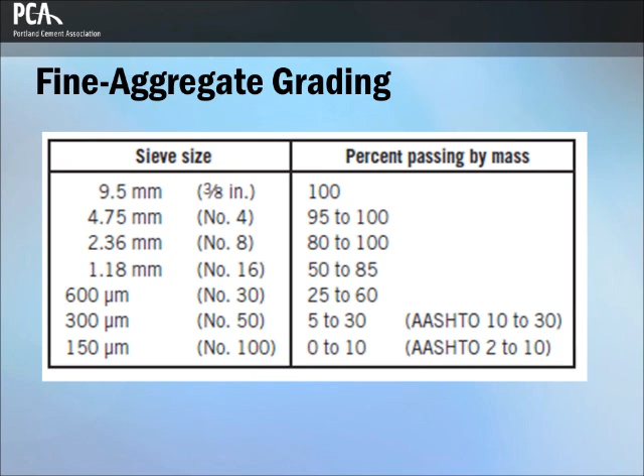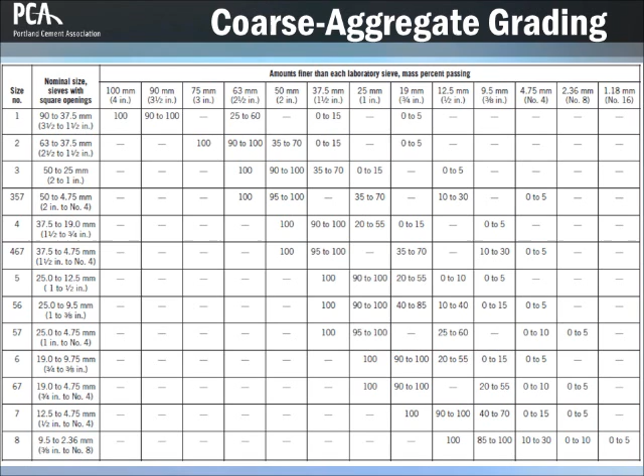The coarse aggregate grading requirements of ASTM C33 permit a wide range of grading and a variety of grading sizes, as shown in this table. The grading for a given maximum size coarse aggregate can be varied over a moderate range without appreciable effect on cement and water requirement of a mixture if the proportion of fine aggregate to total aggregate produces concrete of good workability.

The maximum size of coarse aggregate used in concrete has a direct bearing on the economy of concrete. Usually more water and cement is required for small size aggregates than for large sizes, due to an increase in total aggregate surface area. These graphs show that for a given water-cement ratio, the amount of cement or water required decreases as the maximum size of coarse aggregate increases.

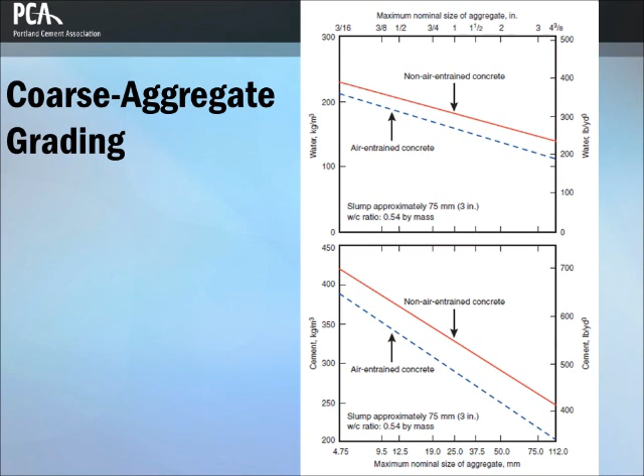Aggregates of different maximum sizes may give slightly different concrete strengths for the same water-cement ratio. Typically, concrete with a smaller maximum size aggregate will have a higher compressive strength. The terminology used to specify size of coarse aggregate must be chosen carefully. When speaking of an assortment of particle sizes, the size number of the gradation is used.

Often there is confusion surrounding the term maximum size of aggregate. The maximum size of an aggregate is the smallest sieve that all of the particular aggregate must pass through. The nominal maximum size of an aggregate is the smallest sieve size through which the major portion of the aggregate must pass, typically 85% to 95% passing.

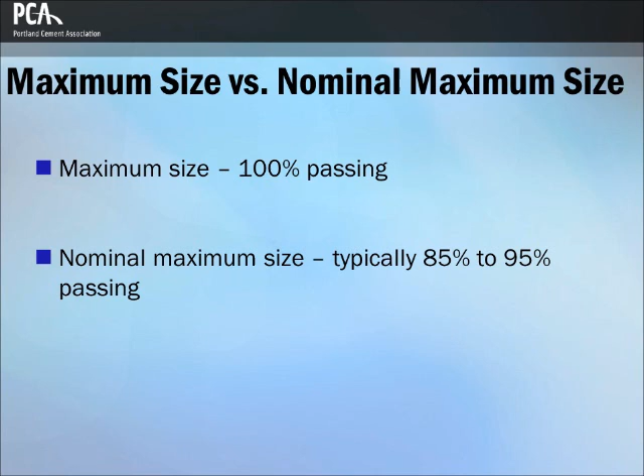The maximum size of aggregate that can be used generally depends on the size and shape of the concrete member and on the amount and distribution of reinforcing steel. Requirements for limits on nominal maximum size of aggregate particles are covered by ACI 318. Using this illustration, the nominal maximum size of aggregate should not exceed 1/5 the narrowest dimension of a vertical concrete member, 3/4 the clear spacing between reinforcing bars and between the reinforcing bars and forms.

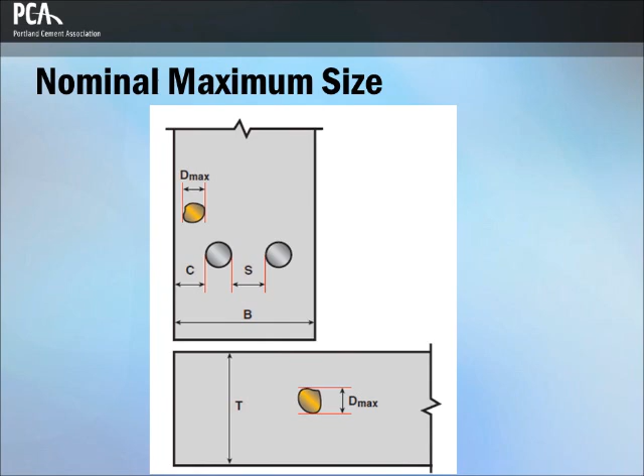Aggregate is sometimes analyzed using the combined grading of fine and coarse aggregate and the proportions they should exist in concrete. This provides a more thorough analysis of how the aggregates will perform in concrete. The effect of a collection of various sized aggregate particles in reducing the total volume of voids is best illustrated in these figures.

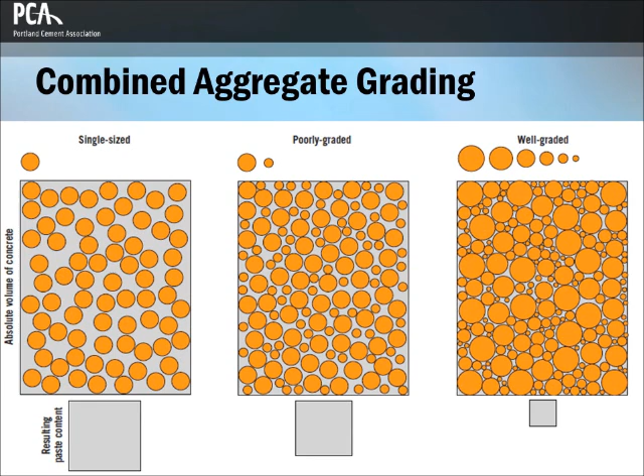A single size aggregate results in higher voids. When the two aggregate sizes are combined, the void content is decreased. As several additional sizes are used, a further reduction in voids would occur. The paste requirement for concrete is dictated by the void content of the combined aggregates.

In reality, the amount of cement paste required in concrete is somewhat greater than the volume of voids between the aggregates, shown here. The illustration on the left represents coarse aggregates, with all particles in contact. The illustration on the right represents the dispersal of aggregates in a matrix of paste. The amount of paste necessary is greater than the void content in order to provide workability to the concrete. The actual amount is also influenced by the cohesiveness of the paste.

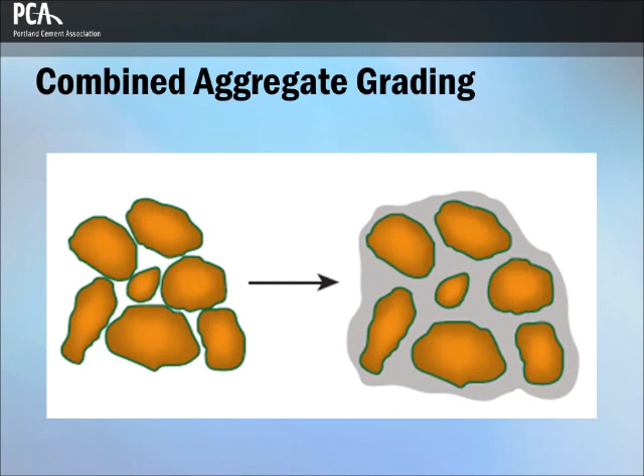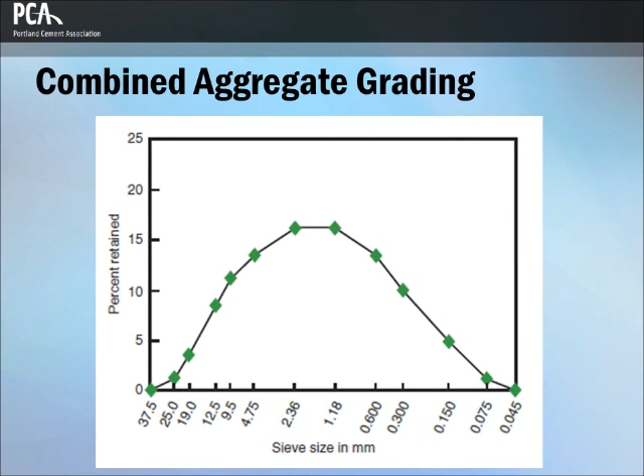Studies on air-entrained concrete found that the water-cement ratio could be reduced by over 8% using combined aggregate gradation. In gap-graded aggregates, certain particle sizes are intentionally omitted. Typical gap-graded aggregates consist of only one size of coarse aggregate, with all the particles of fine aggregate able to pass through the voids in the compact coarse aggregate.

Gap-graded mixtures are used in architectural concrete to obtain uniform textures and exposed aggregate finishes. They are also used in pervious concrete mixtures to improve stormwater management. Care must be taken in choosing the percentage of fine aggregates in a gap-graded mixture. A poor choice can result in concrete that is likely to segregate or honeycomb because of an excess

of coarse aggregate. Also, concrete with an excess of fine aggregate would have a higher water demand, resulting in higher shrinkage. Fine aggregate content depends upon cement content, type of aggregate, and workability. Segregation of gap-graded mixtures must be prevented by restricting the slump to the lowest value consistent with good consolidation.

Because of their low fine aggregate volumes and low water-cement ratios, gap-graded mixtures might be considered unworkable for some cast-in-place construction. When properly proportioned, however, these concretes are readily consolidated with vibration.

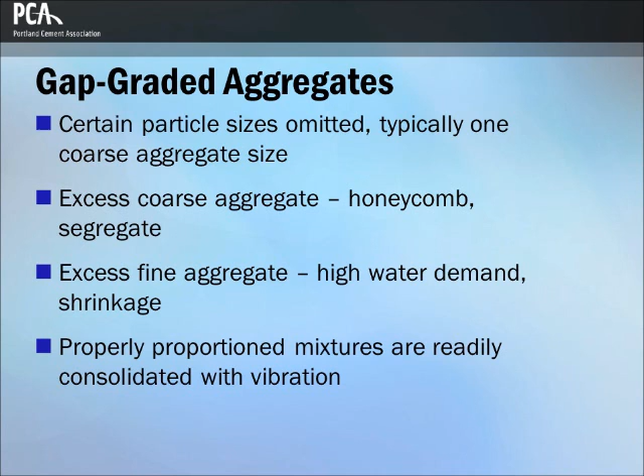The fineness modulus, FM, of either fine, coarse, or combined aggregates according to ASTM C125 is calculated by adding the cumulative percentages by mass retained on each of a specified series of sieves and dividing the sum by 100. The specified sieves for determining FM are number 100, number 50, number 30, number 16, number 8, number 4, 3/8 inch, 3/4 inch, 1 1/2 inch, 3 inch, 6 inch.

Fineness modulus is an index of the fineness of an aggregate. In general, the higher the FM, the coarser the aggregate. An example of how the FM of a fine aggregate is determined, with an assumed sieve analysis, is shown in this table.

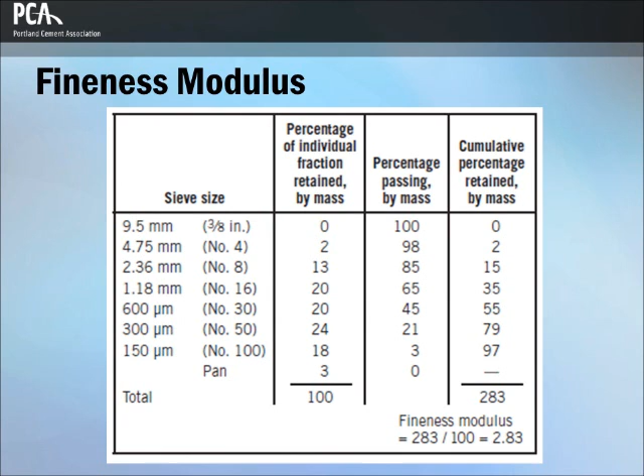The particle shape and surface texture of aggregate influence the fresh concrete properties more than the properties of hardened concrete. Rough-textured, angular, elongated particles require more water to produce workable concrete than do smooth, rounded, compact aggregates. In turn, aggregate particles that are angular require more cement to maintain the same water-cementing materials ratio. Angular or poorly graded aggregates may also be more difficult to pump.

Void contents of compacted fine or coarse aggregate can be used as an index of differences in the shape and texture of the aggregates of the same grading. The bond between cement paste and a given aggregate generally increases as particles change from smooth and round to rough and angular. Flat and elongated aggregate particles should be avoided, or at least limited to about 15% by mass of the total aggregate. A particle is called flat and elongated when the ratio of length to thickness exceeds a specific value.

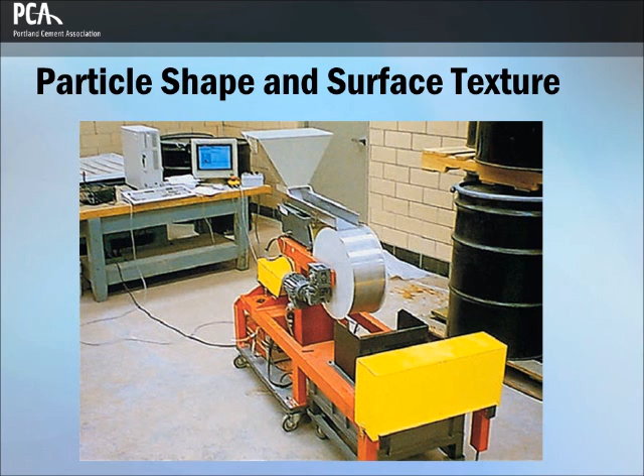A number of automated test machines are available for rapid determination of the particle size distribution of aggregate. Shown here is a video grader that measures size and shape of an aggregate by using line scan cameras wherein two-dimensional images are constructed from a series of line images.

The bulk density or unit weight of an aggregate is the mass or weight of the aggregate required to fill a container of a specified unit volume. The volume is occupied by both aggregates and the voids between aggregate particles. The approximate bulk density of aggregate commonly used in normal weight concrete ranges from about 75 pounds per cubic foot to 110 pounds per cubic foot.

The void content between particles affects paste requirements in concrete mix design. Void contents range from about 30% to 45% for coarse aggregates to about 40% to 50% for fine aggregate. Angularity increases void content, while large sizes of well-graded or uniform aggregate and improved grading decrease void content.

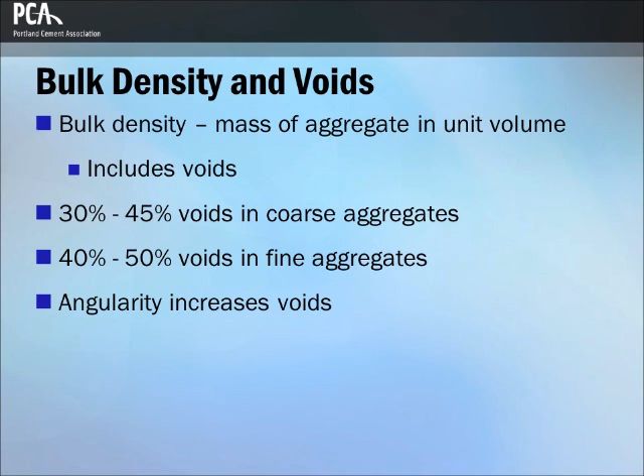The density of aggregate particles used in mixture proportioning computations is determined by multiplying the relative density of the aggregate times the density of water. Most natural aggregates have particle density of between 150 and 181 pounds per cubic foot.

The relative density of an aggregate is the ratio of its mass to the mass of an equal absolute volume of water. Most natural aggregates have relative densities between 2.4 and 2.9, which means that the aggregates are 2.4 to 2.9 times as dense as water. It is used in certain computations for mixture proportioning and control, such as the volume occupied by the aggregate in the absolute volume method of mix design.